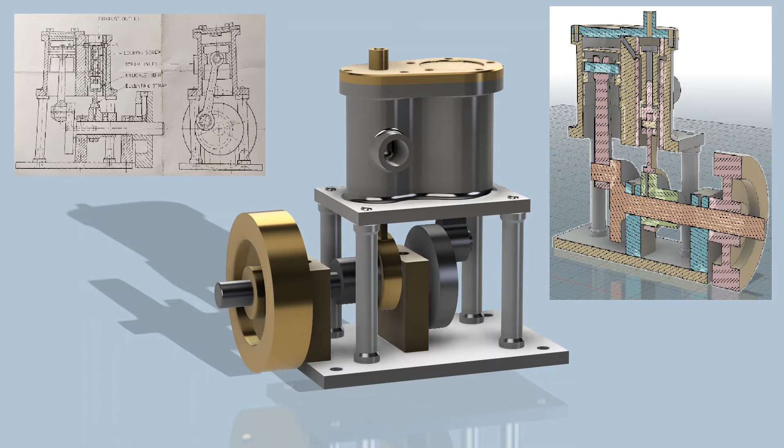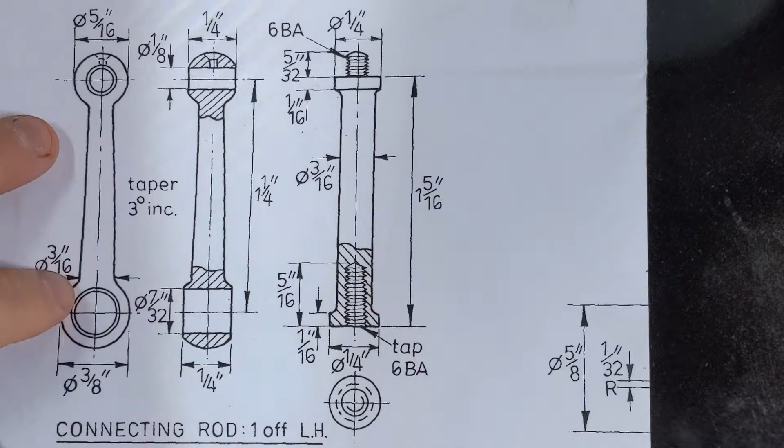And here we are at the beginning of episode 2. So we are going to start off by machining 4 of these pillars. Forget this connecting rod, not doing that right now. We'll come back to that later.

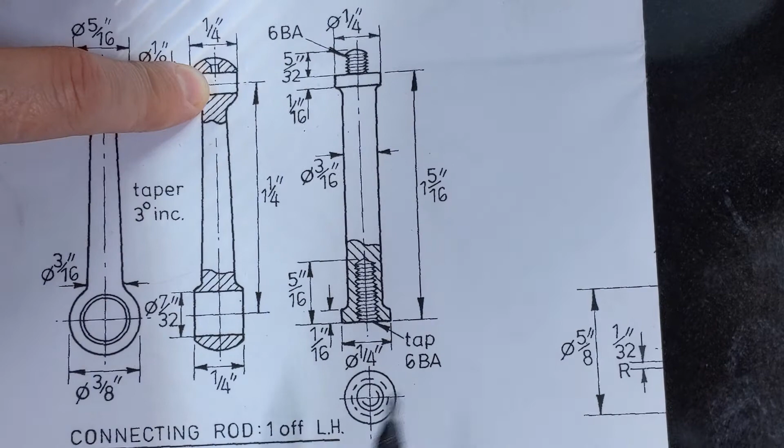4 of these pillars. Game plan is going to be, we'll first face off, drill, and then extend that out of the chuck. We'll come in here with a live centre, hold it, and then be able to machine this section in here, and then we'll part off here, and we'll do that 4 times.

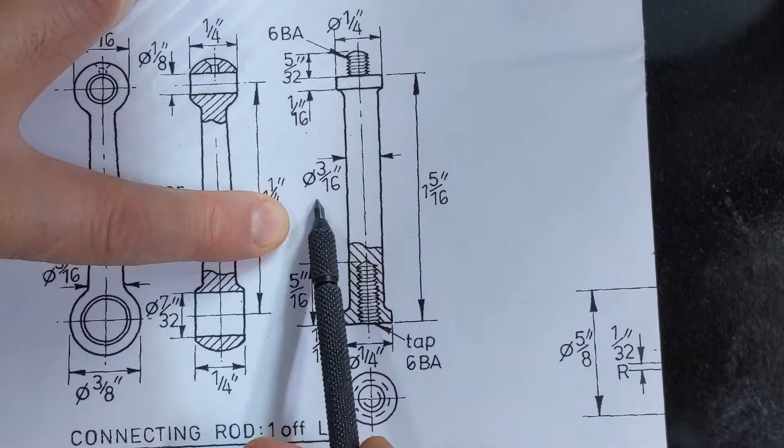And then what we'll do is we'll make some sort of split collet holder type of thing that will go around this sort of thinner waist, I suppose, which we can then use to machine this end. So this end's not got to be too concentric, I guess, because it's just a thread. It's going to be a short thread. As long as it's close and good enough, we should get away with that.

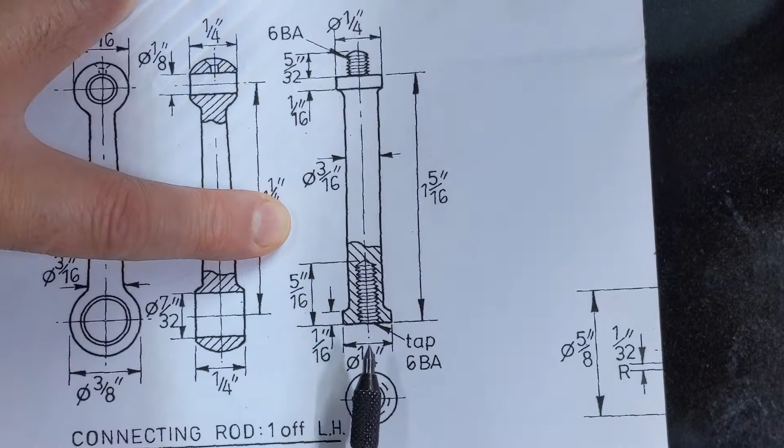So that's the game plan there, and there we go. So drill down here, live centre, machine this section, part off, flip round, machine this side. Cool. I will bring you back in due course.

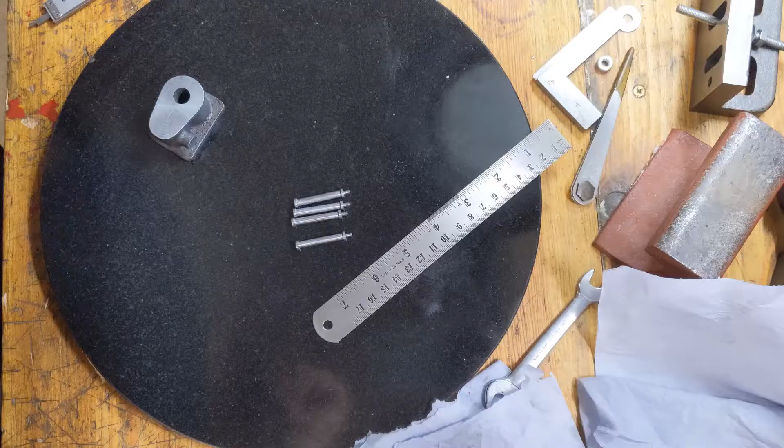Right, so here we are. We have now machined four of these posts, all identically sized. We've got the 6BA on the top, 6BA on the bottom. So they are all now done, finished.

I did do, as I described, I made a piece of brass, drilled and reamed the right size for fitting this shaft, split it, mounted it in the four-jaw. Took a bit of a faff about, because every time I swap one in, swap one back out again, I re-indicated, but it was worth it in the end. Got there, got them done.

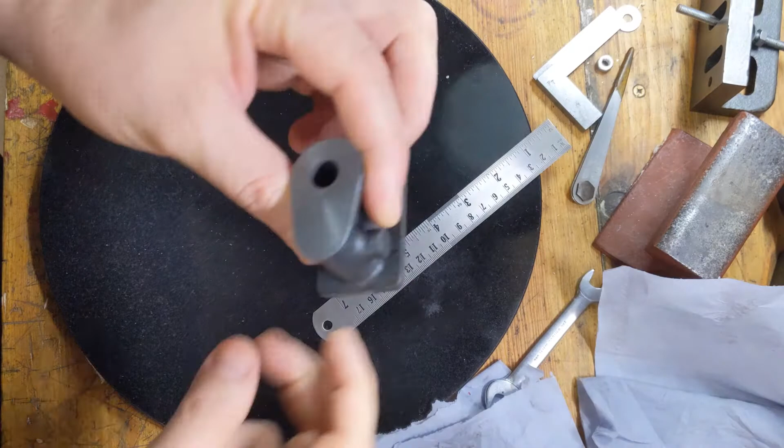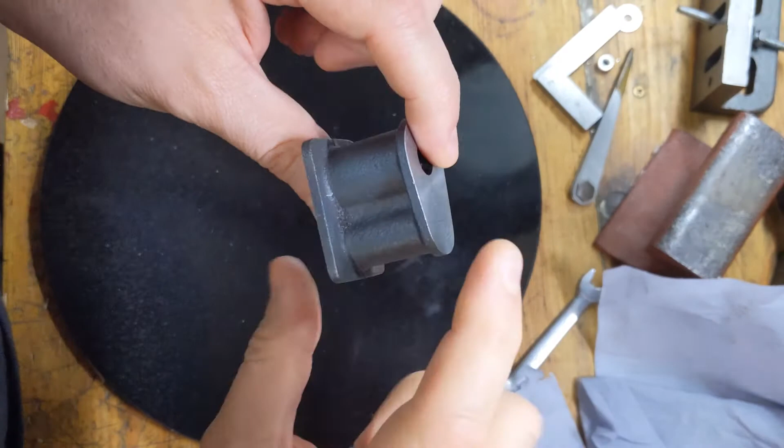Next stage, we're going to have a crack at this casting. So I have actually already off camera mounted it in the four-jaw, and I've already taken a cut across this face and a cut across this face, and this is now 1¼ inch total. Yep. So that's now to the right height dimensionally this way.

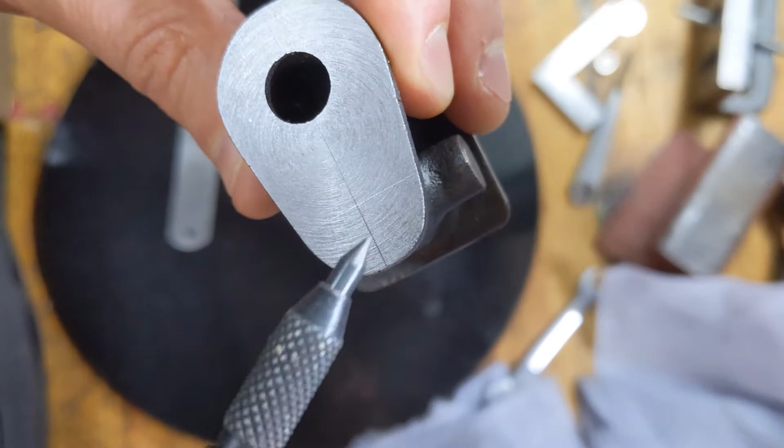Next is going to be boring out the main cylinder and then the valve bore just here. I think we'll do that. Might just be able to make out here, there we go, you should be able to, just sort of having a play with marking out the valve bore. It needs to be

7/16 from this edge, which is fine, I guess, in principle, but this is just a rough cast edge. But actually measuring that and mounting it and getting the vertical height gauge gets to about there, which actually fits quite nicely almost down the centre of this. So that's not too bad, I'm quite happy with that.

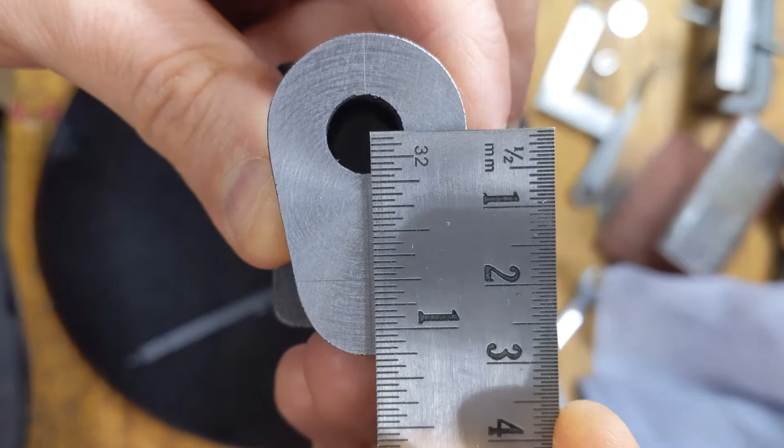The next bit though is interesting, because the centre bore of that then needs to be 3/4 of an inch across to there. So actually seems to be pretty much bang on the centre of this core. I've got no way to mark that up really, and I need to turn this on the lathe because I haven't got a mill or a boring head for the lathe, so I could mount it on the vertical table.

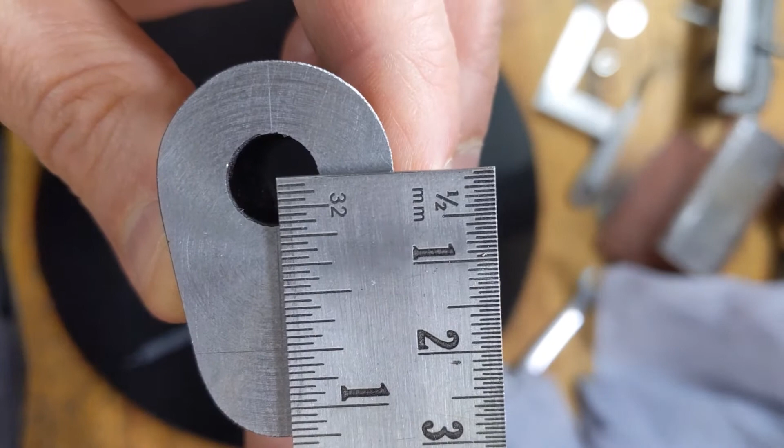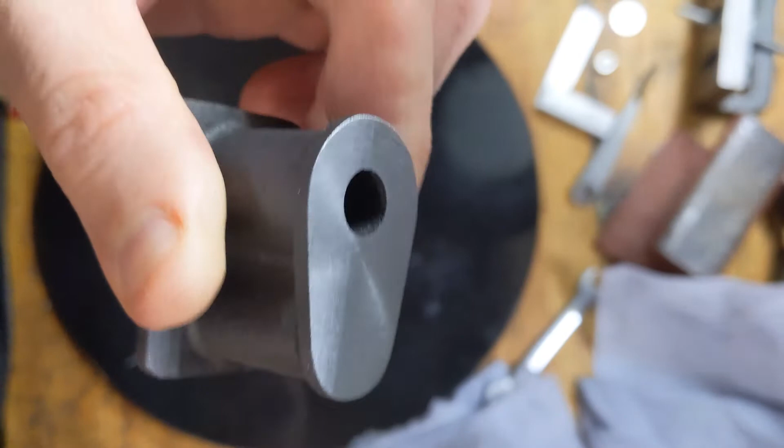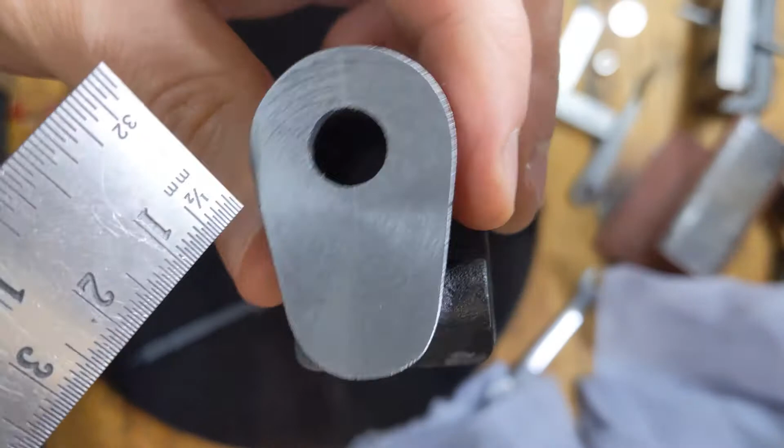So I'm still planning on mounting this in the four-jaw chuck, and this actually seems to be reasonably well positioned. So I'm thinking at the minute, and I might have a cup of tea while I think about this, mounting this up in the four-jaw based upon this hole. So maybe attempt to indicate. It's reasonably circular, so you might get a half decent indication off of this hole. So mounting that so that's concentric in the four-jaw, and then just boring through,

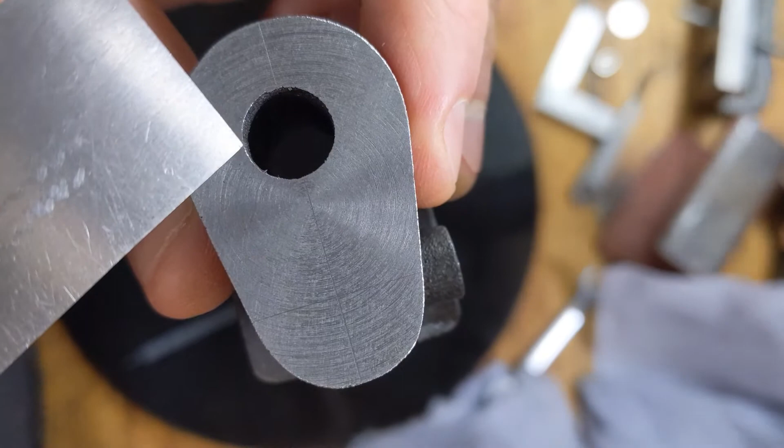and then from that point onwards we know obviously the diameter, the radius in fact, of the hole that we bore, and then we're going to know sort of how much over we're going to have to go to get to here, because if we then have a look at the picture, have a look here.

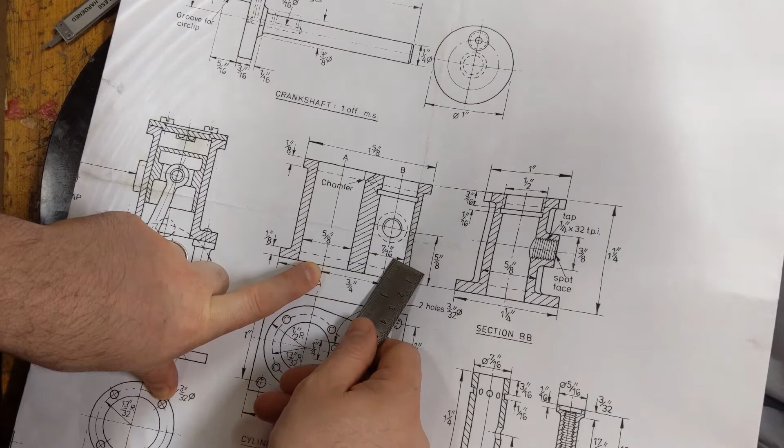So if we know the radius here for this, and we know the distance we need, and we know the radius or the diameter of this bore, we can then work out what this distance here is, and actually we can use that to then lay out for this bore and get it reasonably accurate. So that's the plan I'm working on for the minute. I might go have a cup of tea and think about it.

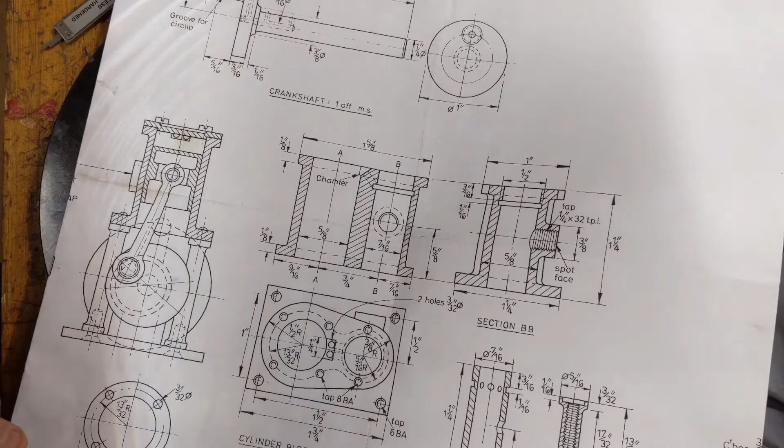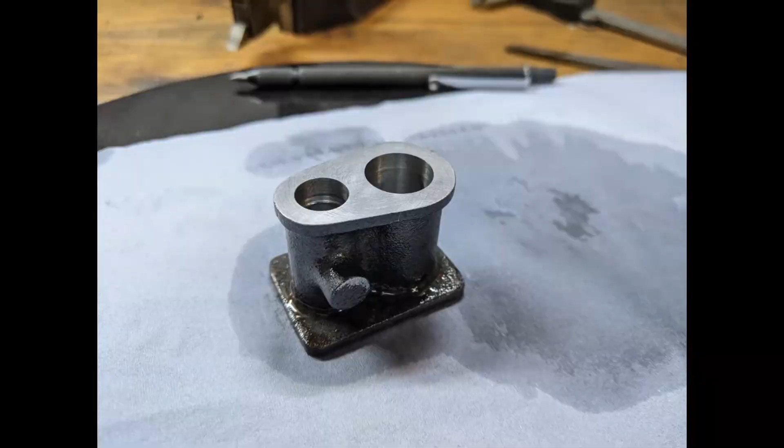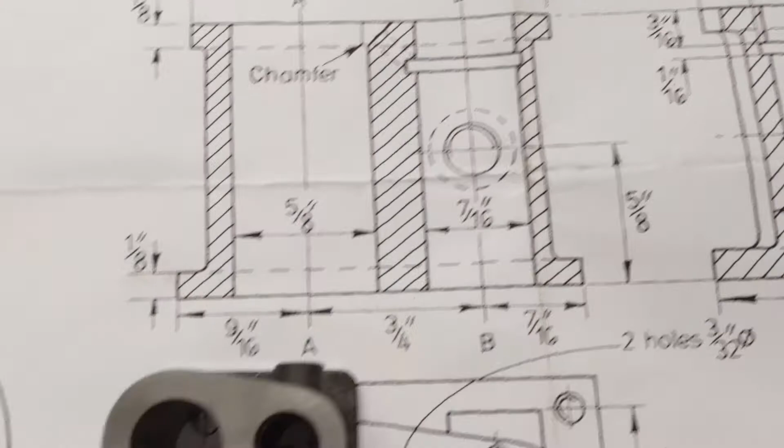Okay, so here we are. We are back. There it is. Bosh. We've even done this inside groove here. This is an inside steamway from the valve bobbin. So yeah, there we are. It does look like that. Apart from, obviously, we haven't done the steam passages, so there's no way to get steam from the valve to the cylinder. But we'll rectify that next.

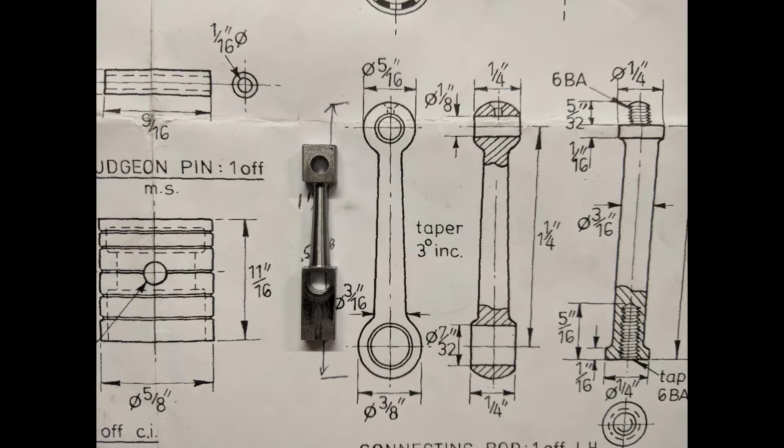So here we are back. I've done a few other bits off camera, so it's been a while, but we're now back on it. And so this is where we are. We have all these bits here. I think the last thing we spoke about was probably this crankshaft. Sorry, not crankshaft, connecting rod.

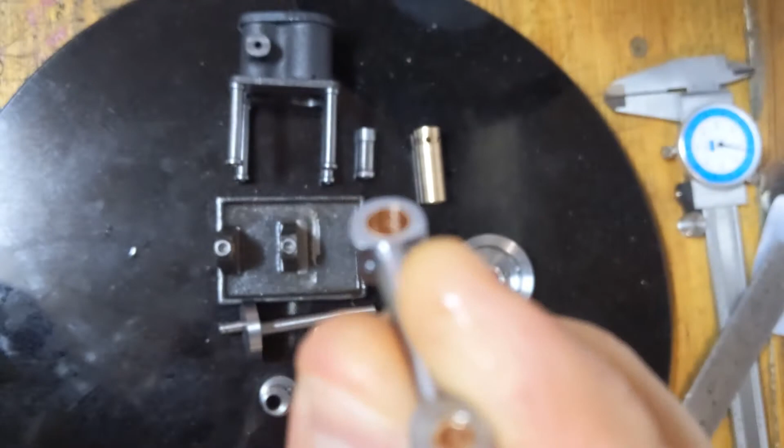So here it is with two bronze bushes on the inside, oil hole on the top. There you are, lovely focus, and slight deviation from the drawing, but gone for an oil hole on the side there. Just because, actually, what I haven't done, which is also another deviation from the drawing, is draw internal oil ways inside of the crankshaft, which we can do. I mean, the crankshaft's a reasonably simple item, but I did think it was an overcomplication. And we can get oil to the other parts easy enough. So, yeah, I can always come back a bit later on and make a new one if I so desire.

But the stage we're up to now is I've essentially got 3 parts left. I need to make a piston. I then need to make a gudgeon pin to connect the piston to the connecting rod, and then I need to make some cylinder covers to go on top of this chap. So today's task is piston.

We've got a nice bit of cast iron. This came off a larger lump of stock, which I've cut down to about 1 3/8 ish, which is fine. But actually, I need 11/16. So we're going to be following the drawing as here.

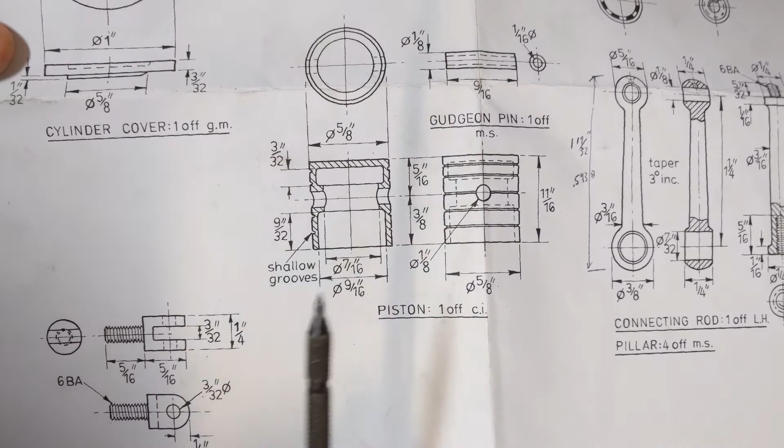So the game plan initially is chuck it up with this end in the chuck. We'll come down, we'll drill rough most of this out, then we'll come in with boring bar, hit this diameter here, or I'm still debating whether or not it's worth hitting that diameter or just making this diameter all the way through. I guess hitting this diameter and boring it out a bit further around, so you can see here, and then coming in and doing this tool. We've certainly got the tools to do that bit as well up here.

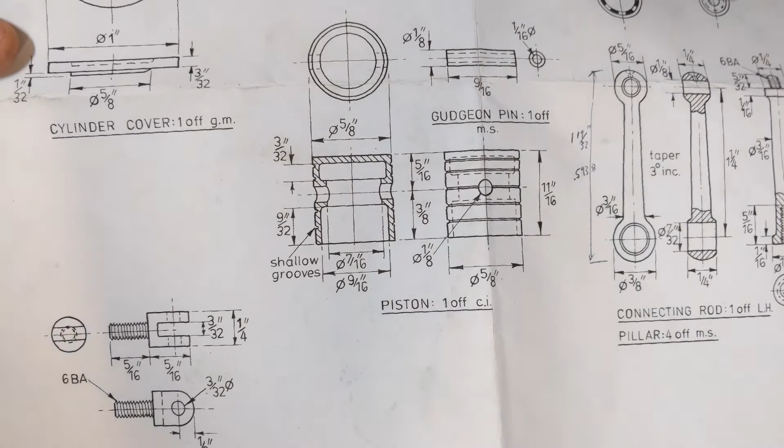Lightens the piston, which I guess potentially, lower reciprocating mass might be worthwhile. Still debating whether or not it's really truly worthwhile. I guess we'll see how I feel as time comes on. So going to make a start now. We'll move over to the Myford and we'll get cracking.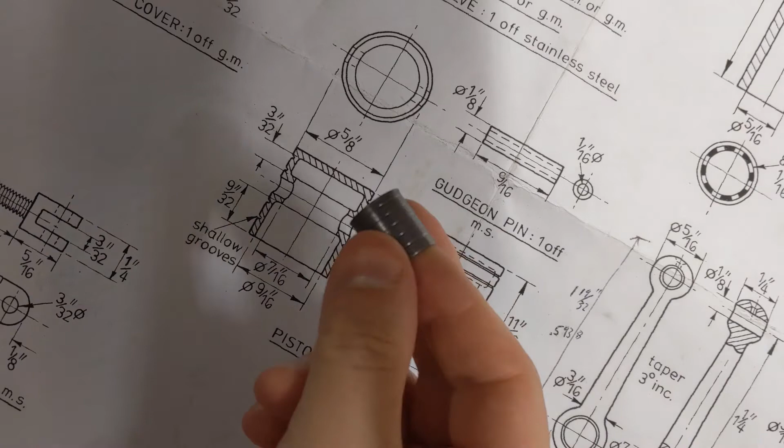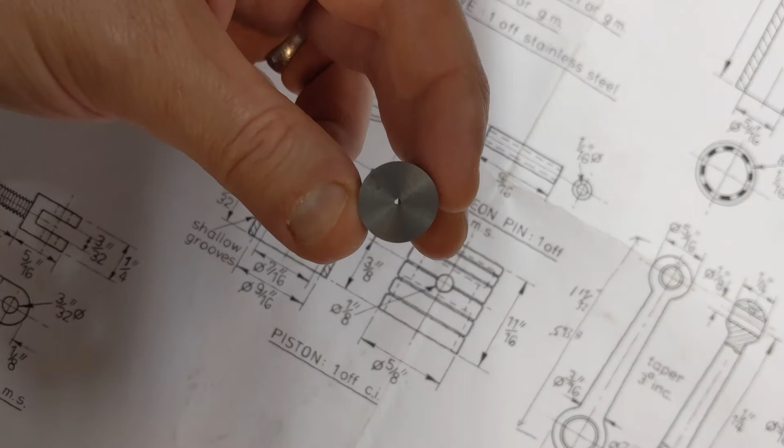There we go, one piston, although it's not, because I drilled a hole through it. You might be able to see it if it focuses right. There we go. I used a twist drill too far through, forgot it had the point on the end, faced off the end, broke through. I'll be back shortly. Piston number 2 finished. There we are. Done, complete with a gudgeon pin and the connecting rod already in. Beautiful.

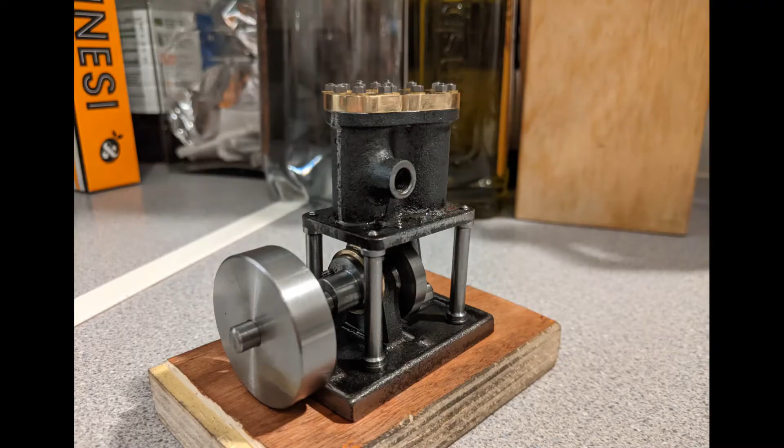Righto folks, ta-da! Here it is. It is now complete and assembled. Here we go. Nice smooth action. We've provisionally timed it, so we'll see what happens. It's a bit oily because I went a bit crazy with the 3-in-1 as I was putting it together, but that's alright. Ignore the base for now.

We'll get a nice plinth. I thought I had a good plinth to put it on. Turns out I didn't. Well, actually I want to save that bit of wood for something else, so we'll have a rummage around, scrounge from somewhere else, I guess. Just something small. Something in the region of about 4 inches by about 3 inch, something like that.

We shall see. So the next thing is we'll hook up the air compressor. We'll try it out, see if it turns over. I think it should do. I mean, it's very smooth. It's got a bit of compression as it goes over and it comes down. It's nice. You can hear it if I put some oil into the valve chest. You can hear it gurgling and sucking a little bit. So yeah, and then we'll make up an adapter, I think, to go in here, and we'll do it properly. But we'll just shove the air hose in right now, and we'll come back for a proper run.

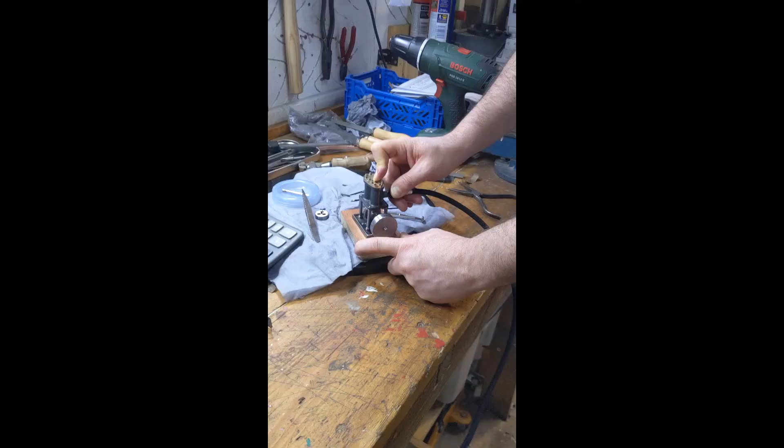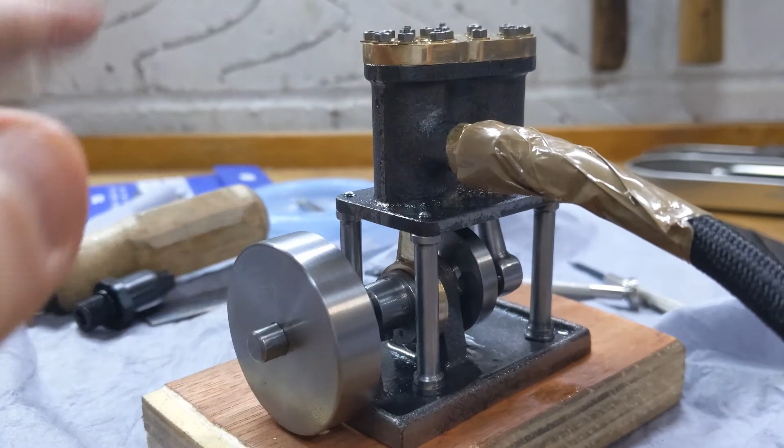First run. I'll make a proper adapter in a second. Here we go. And it's off. And we are running at just under 10 psi. Seems pretty happy with that. There we go. There we are. Awesome sauce.